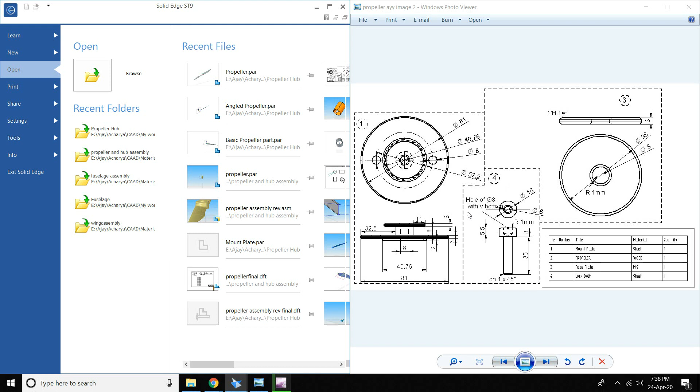So we'll continue with the next part. New metric part.

First we'll do the mount plate, that is here. Go to your top view first. The biggest diameter is 81, so we'll draw that circle by center.

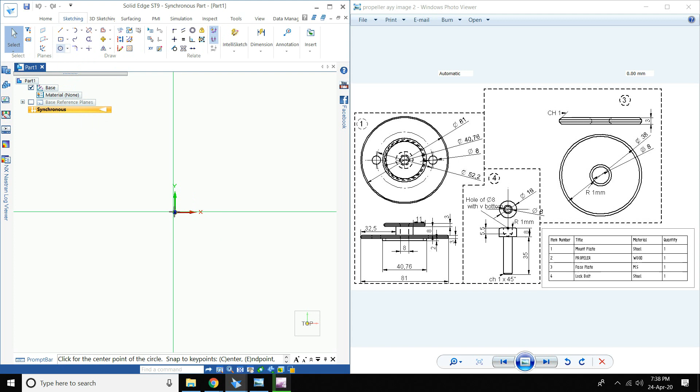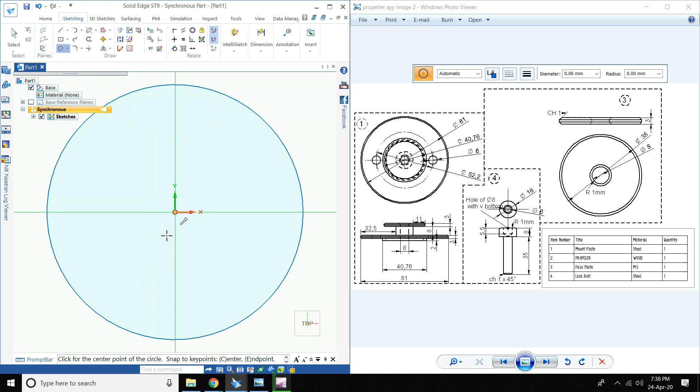81. Zoom in, and then you have another diameter protruding out, 40.76 downwards. Again take circle by center, 40.76, and then come to your home view.

We'll extrude it. So the outer one, right click, is extruded for 3 mm, and the bottom one is extruded in the opposite direction. I think it took some value by default.

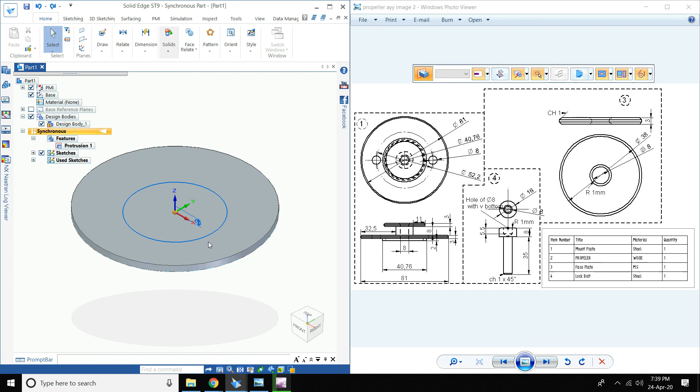Let's do that again. Extrude, click, right click, bottom. So that is about 2 mm. Done.

Now we have a protrusion here. So this is, if you can remember, this is where your propeller goes in. So this is 16, the whole thing is 16.

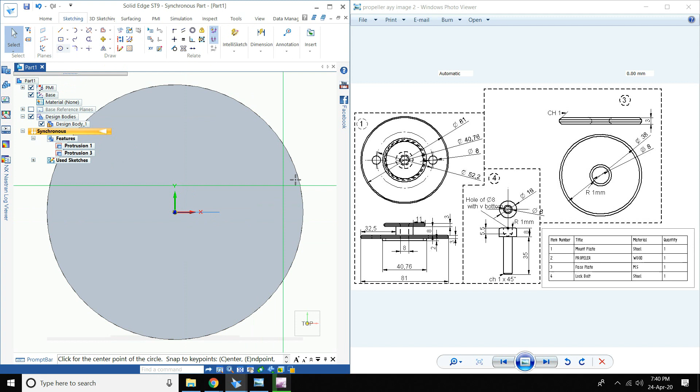Again, go to your top view and create this on this plane. So come to the edge, and this will be 16.

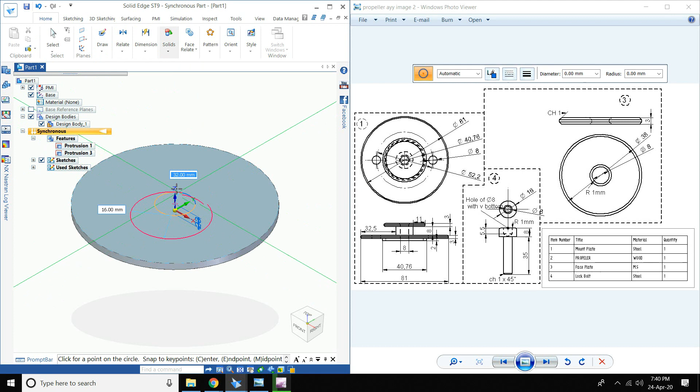Right click, home view, extrude, right click. I think the whole height is about 8 mm. Done. And then you have another plate here.

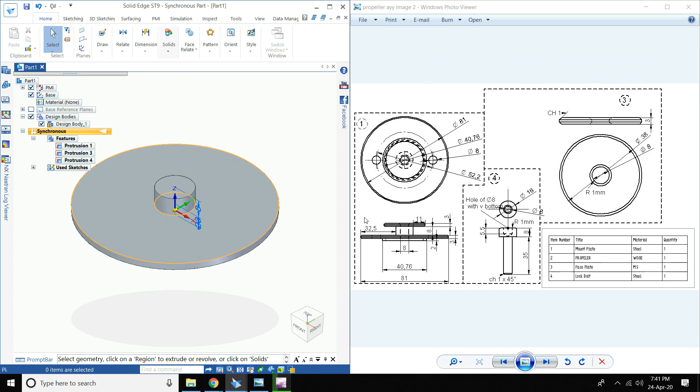So the dia of that plate, you can see from here, is 52. No, sorry, it's not 52. 52 is the line that these holes are in. This is 16 plus 11 plus 11, so 16 plus 22.

We'll go to the top view. Click on this plane, lock it, 16 plus 22. Remove excess.

Now extrude this plane, right click, 3 mm. Done.

I think we have our basic design. Now we'll have to punch those holes. Go to your top view.

First take circle by center, and on this plane, first lock the plane, and on that plane, from the center, you draw 52.2. Okay, and upon those you have 8 dia circle by center, and on the same plane intersection draw 8 dia, and another 8 dia. Now you can select this and remove this line.

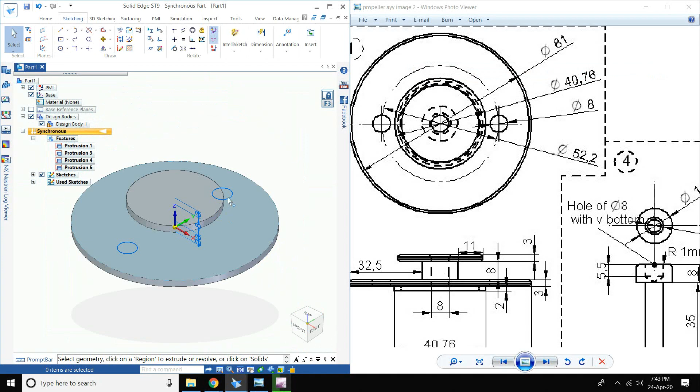Now draw another circle by center. That will be drawn on this plane. What you do, you just click escape and come out of the plane. Okay, those circles are correct.

Top view, circle by center on this plane, dia is again 8. Right click, go to home view. I think that is okay wherever you draw.

You're actually supposed to draw it outside of it, but since it is a hole, it can pass through all of it. Only important thing is you make sure that this is on this plane itself. I mean, even if it is not on that plane, you can still protrude it out, but we'll use the option through all.

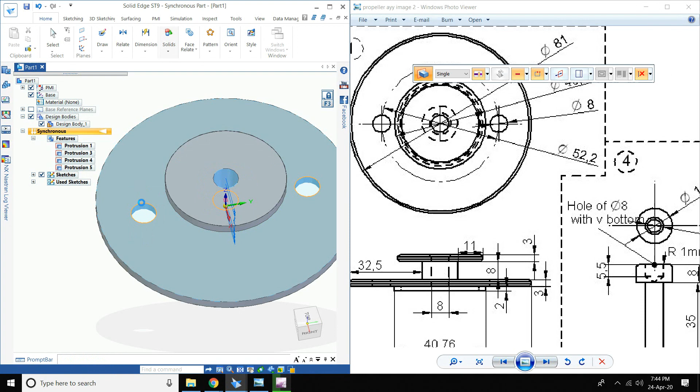So therefore, take this symmetric through all, negative, and right click, direction, like this. Done.

Front view, top view. It is a bit tilted, it's okay. While assembling, just make sure however the direction is mentioned, and then you can see here it has a round.

So it has round, round. Select this 1 mm, enter 1 mm, here 1 mm, here 1 mm.

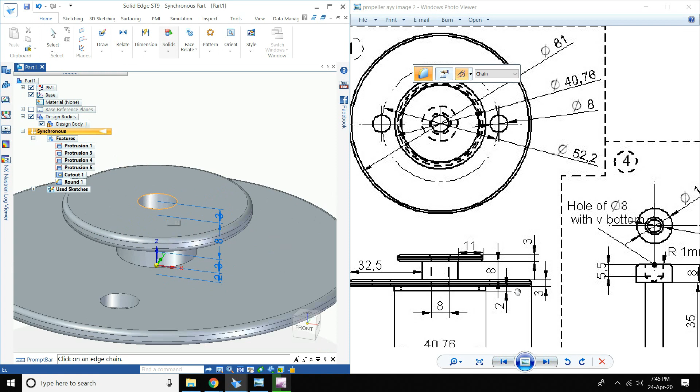I think bottom plate you don't have round, so we'll leave it at that. I think there is chamfer here because you can see it is going down, so we'll give another round here for 1 mm.

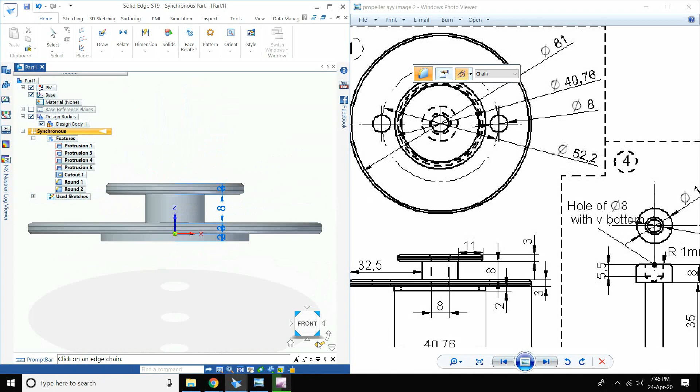So this is how it is supposed to look in the front view, and I think it is okay. So save this. Mount plate.

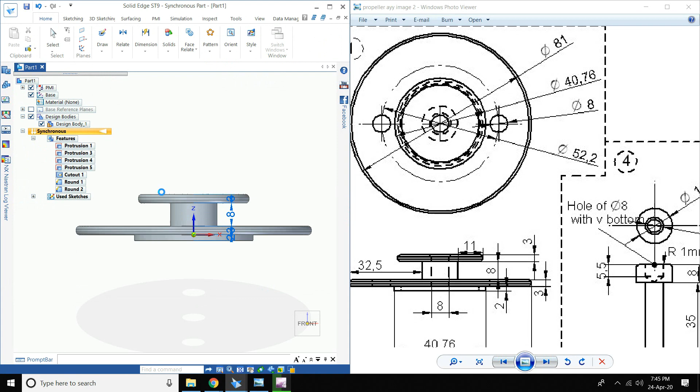Next we'll try to draw, we'll make the face plate, new metric part. Okay, top view. I think the biggest diameter is 38 mm.

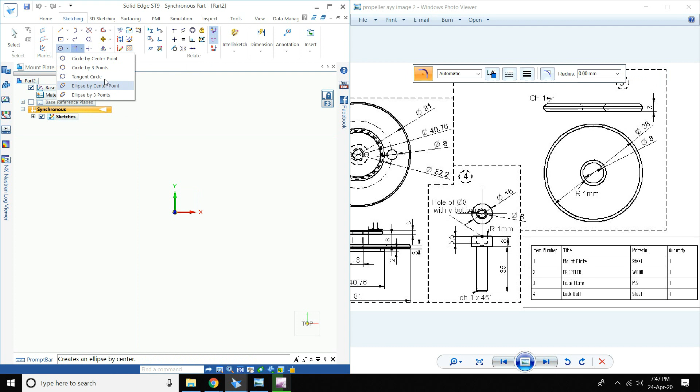So sketching, circle by center, circle by center, 38, fit,

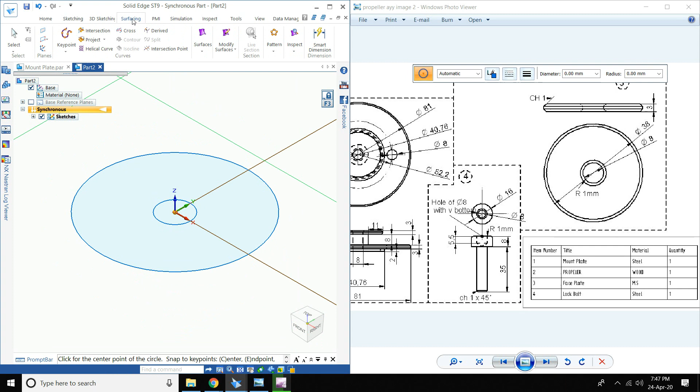and then you have got an 8 hole dia. So 8, enter. Now what we'll do, come to your home, extrude,

take face now, this face, symmetric direction, right click for 3 mm. Done. Now go to your round,

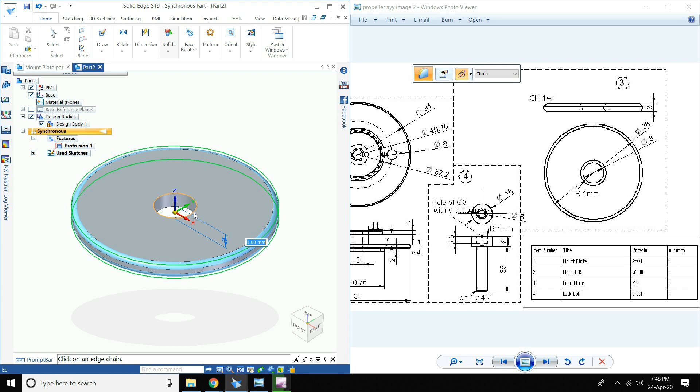1 mm, 1 mm, 1 mm above, 1 mm below. Right click. So the way you intend to say it, you obtained it. Done.

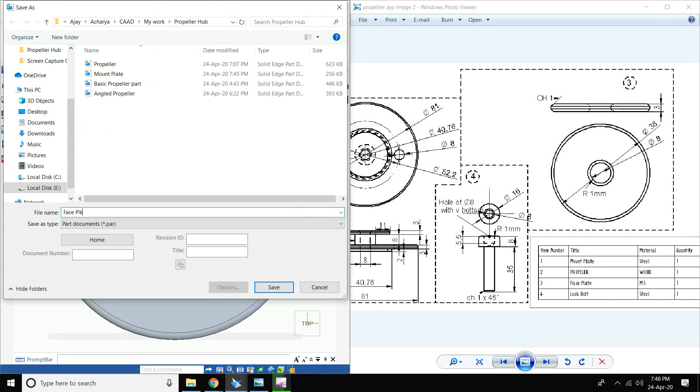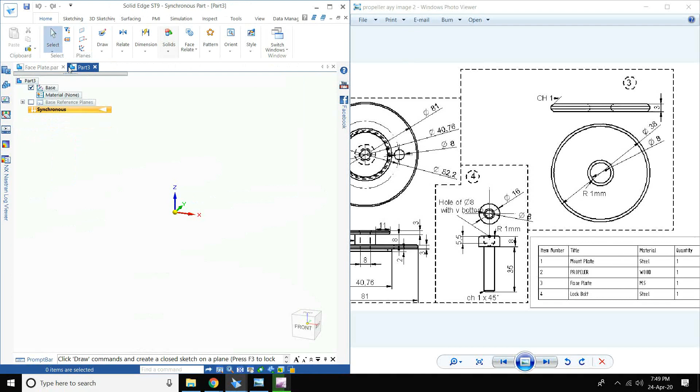So we'll do our next part, that is the lock bolt, new metric part. Close all of this. No necessity, it's not necessary to close, but it might lag.

So what we'll do, we'll draw the first one. So that is we'll draw from the base up. So the minimum is 8. Go to top view.

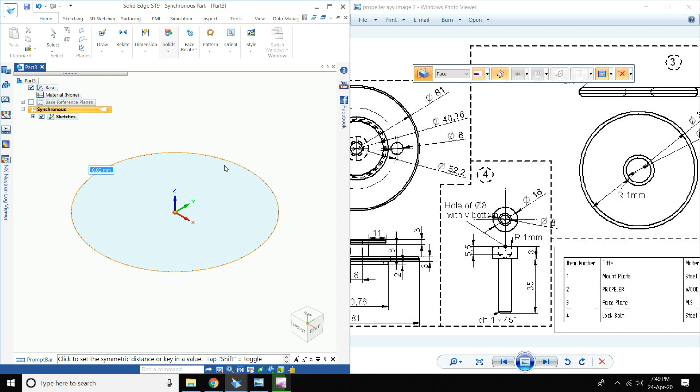Done. Fit. Come to home, and then use your extrude option. Extrude. Right click. This is about. Take it in one direction.

This is about 35 mm. Enter. Fit. Now go to sketching, top view.

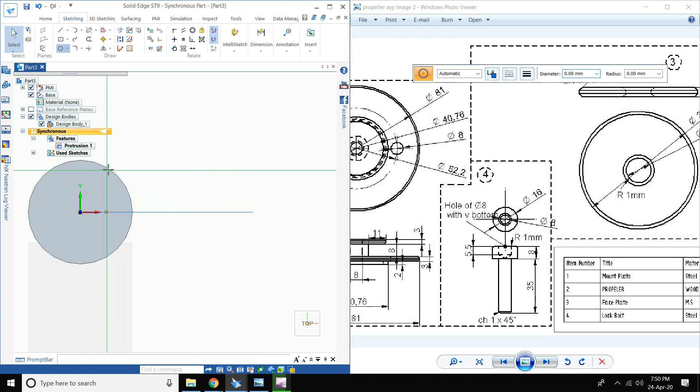On this draw your next one, that is 16 mm. So 16 mm, and go to home.

Now extrude this for 8 mm.

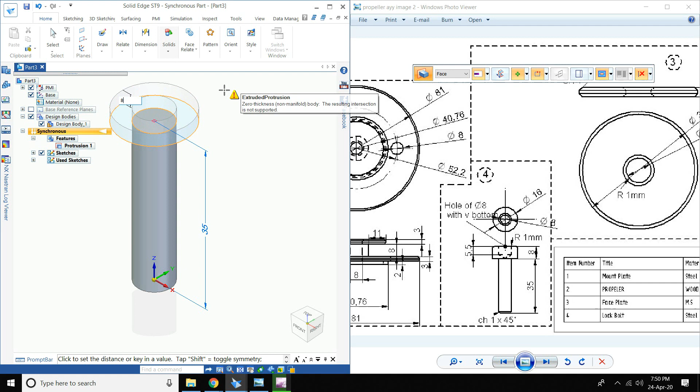Okay, I think the mistake was we didn't select the chain. Solid - this is not a face, it's a chain, I think, but we do need the face. Let us see, control dot plus dot, right click.

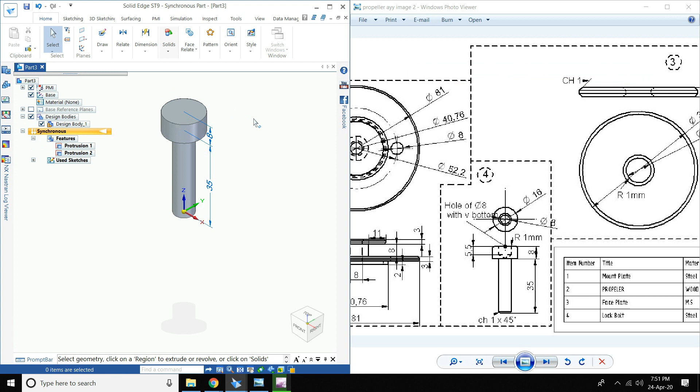Upward. Okay, we will draw the hole again later on. So this is 8. Now this is something new that you guys will study - it is hole of 8 with V bottom.

Go to solids, hole, and in here you take simple and double click on this, and then convert the standard to mm and finite extent. Hole depth from the dimension sheet is 5.5.

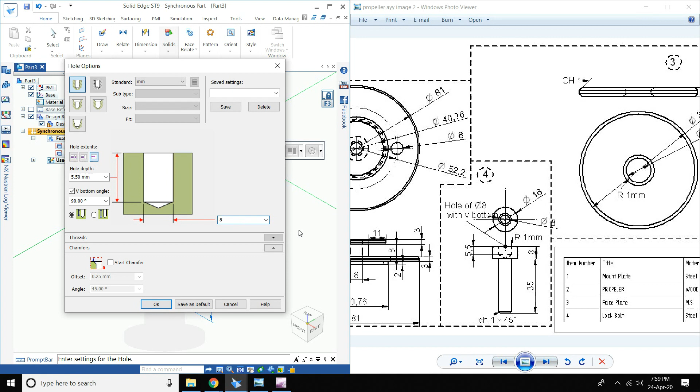Couldn't enter it correctly, so hold at 5.5. Switch on this V bottom, and diameter of the hole is 8. Okay, and okay, now come to the center, click, your hole is done.

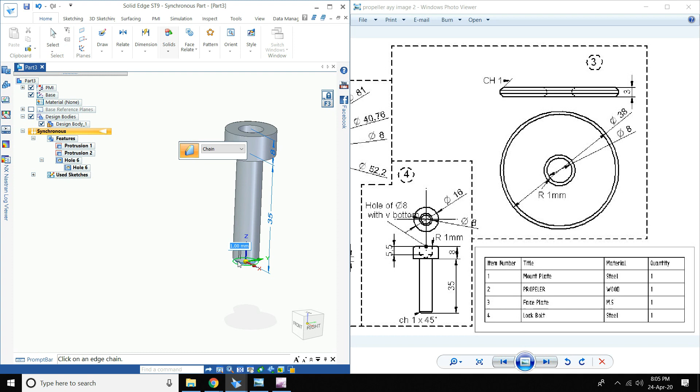So this has got chamfer, equal setbacks, 1 mm and 45 by default it will take. Enter, done. So once all of your parts is done, we'll go to assembly, metric assembly,

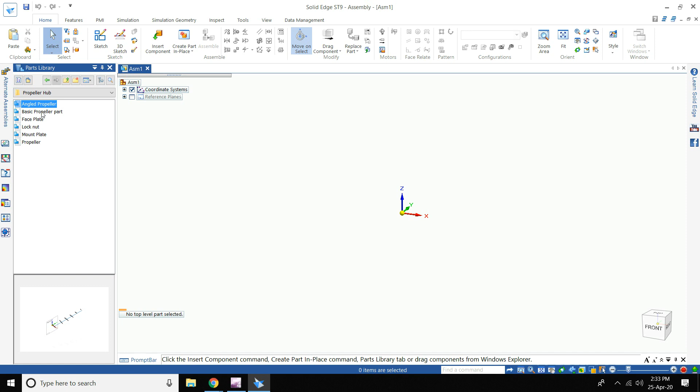and in the tree you'll select where you did your propeller parts. Okay, these are two extra that I made, don't worry about it. And we know first thing is mount plate, drag it onto your screen, and then done.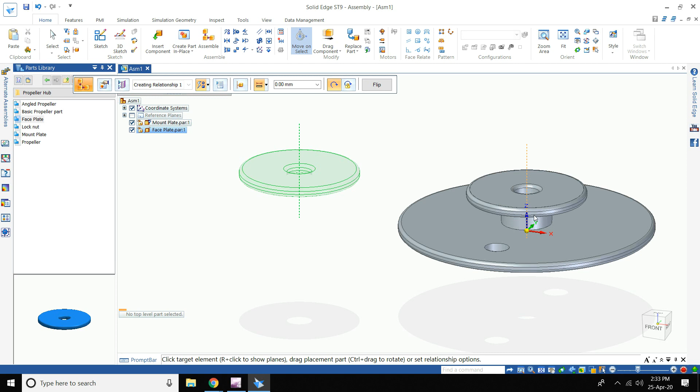Okay, next we'll add a face plate. First alignment is axial, so this axis on this axis. Okay, now then this plane should touch this plane. Done, now that is done.

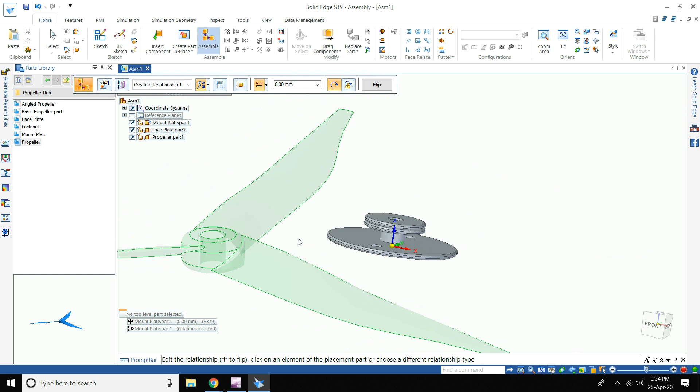We'll take our propeller. This was a 3-winged propeller I designed. We'll take a 2-wing.

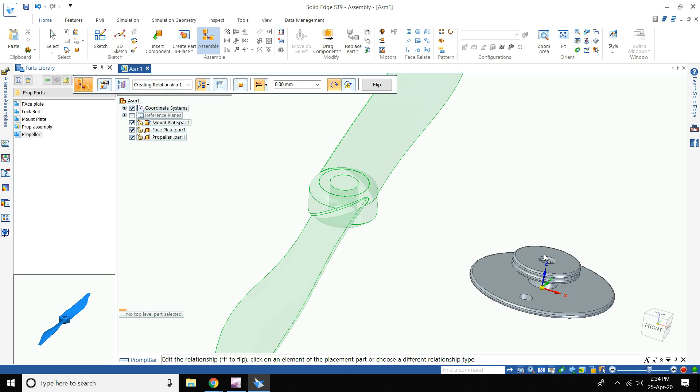Okay, take our propeller. First again axial, this axis on this axis, and this surface should touch this surface.

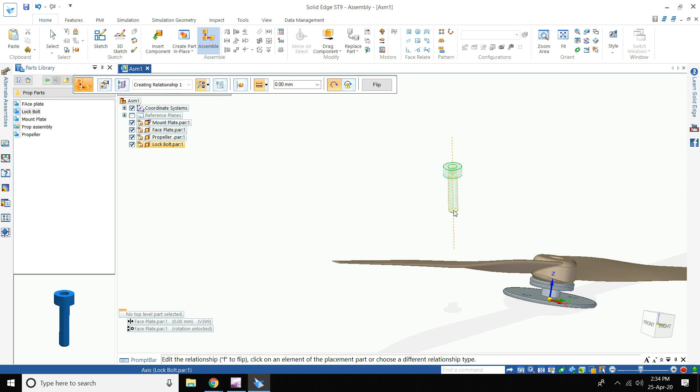And finally we have our lock bolt. Again same - axial, this axis upon this axis, and this plane on this plane.

Press escape, your mates is done. Just check if you're able to drag this along. Yes, so you're able to rotate it.

Okay, one thing I've missed before is to assign the materials, which I've done for this assembly already, but I'll still show you. You'll have to go to inspect, and here properties manager, and in that properties manager you'll have a material. So what material belongs to what?

So lock bolt is actually steel, it is given in your dimension sheet, steel, and propeller is made of wood, any type of wood, you don't need any specification, and faceplate is made up of MS, which is nothing but your mild steel. I didn't find mild steel option here, so just use steel - mild steel - and then you have your mount plate as, again it's also steel.

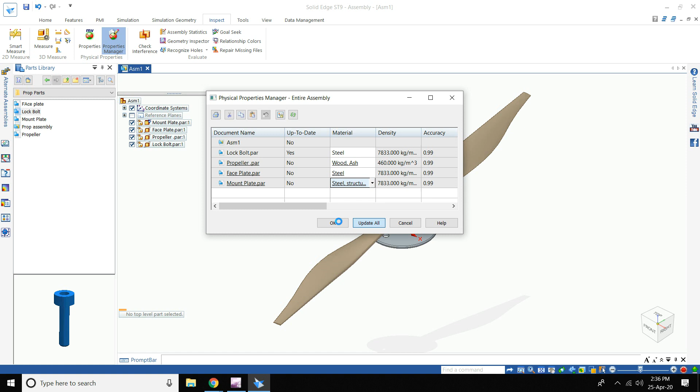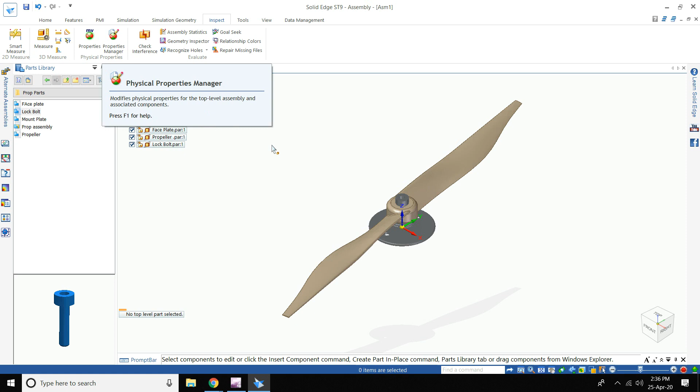Update all. Okay, so you can see the material has been added now. So this will help you in your structural analysis. So when you take this and go use any of the other softwares, probably ANSYS or anything, you can directly implement it and then apply your load. So it will take what is a structure, what force it can withhold, and all those parameters, which you'll probably learn in your 7th semester.

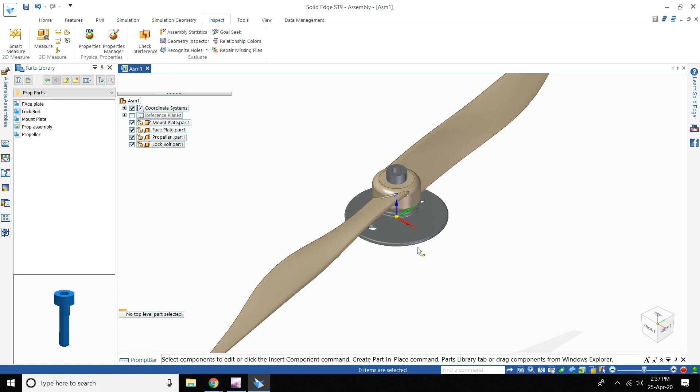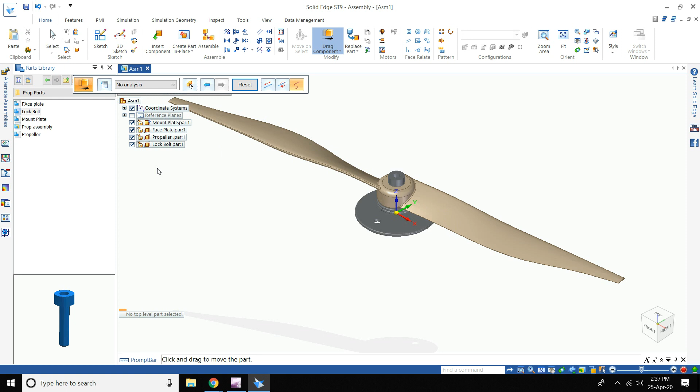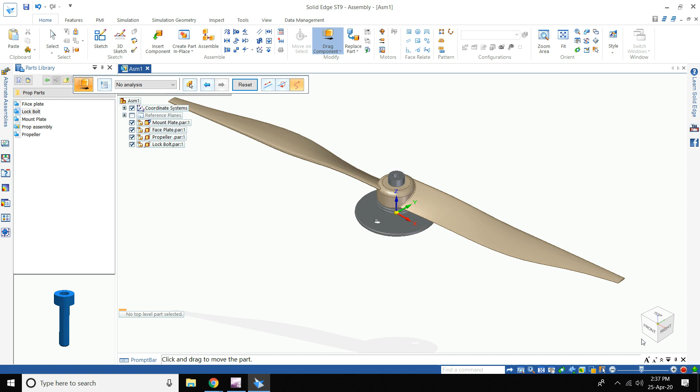Okay, so this completes your propeller hub assembly.